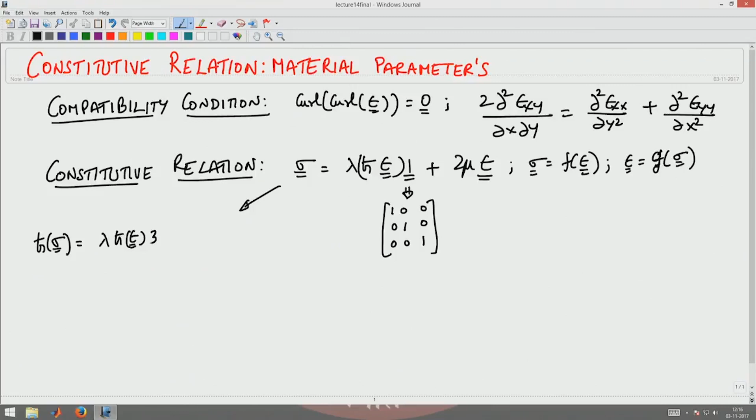From here I find that trace of sigma is given by lambda times trace epsilon, which is a scalar, comes out of the trace expression, times trace of the identity tensor, which is 1 plus 1 plus 1, equal to 3, plus 2 mu trace epsilon. So I get a relationship which says trace of epsilon is trace of sigma divided by 3 lambda plus 2 mu. Now I want to write epsilon in terms of sigma.

So from this equation I get epsilon to be 1 by 2 mu times sigma minus lambda by 2 mu times trace epsilon times the identity matrix. What I have done is I divided this equation by 2 mu and taken this lambda trace epsilon term to the other side of the equal to sign. So I got this expression.

Now I substitute for trace of epsilon from the earlier equation into here, to get the final expression for epsilon as 1 by 2 mu times sigma minus lambda by 3 lambda plus 2 mu, times the trace of sigma, times the identity matrix.

So the final expression for strain which we will carry forward is the following: epsilon is given by 1 by 2 mu times sigma, minus lambda by 3 lambda plus 2 mu, times trace sigma, times the identity tensor. This expression will carry forward.

So we will do a uniaxial experiment first, which is a common experiment done on materials to find the material parameters, and relate the Young's modulus and Poisson's ratio to the Lamé constants, where Young's modulus and Poisson's ratio are parameters obtained from a uniaxial experiment.

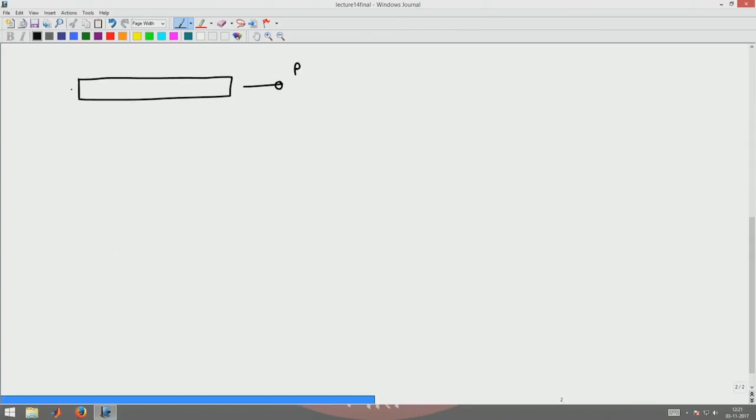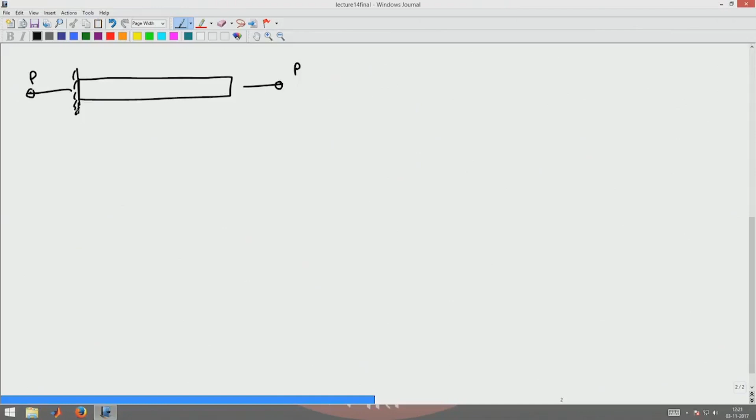So what is this uniaxial experiment? In a uniaxial experiment, you apply a force along the axis of the member alone. Say this is a member, a rod, or a square cross section bar, and you pull this bar along a particular direction with a force P. You fix this end, so there will be a reaction force P also coming in there. So what happens now when I pull this bar? It is going to shrink and it is going to expand.

It is going to shrink in the lateral direction and expand in the other direction. Now, let us say this displacement was delta B, this is A and this end is B, and that deflection was delta B.

Now, I have to assume a displacement field to start solving this boundary value problem. So the displacement field I assume is a displacement field U, which I want to be delta B at a distance L from end A. Say the length of the bar initially was L.

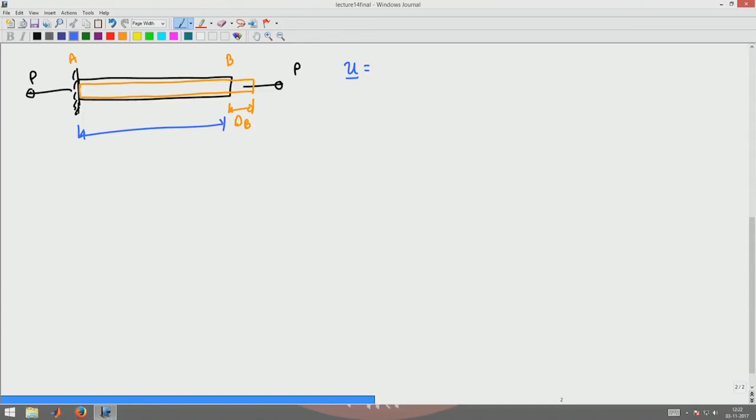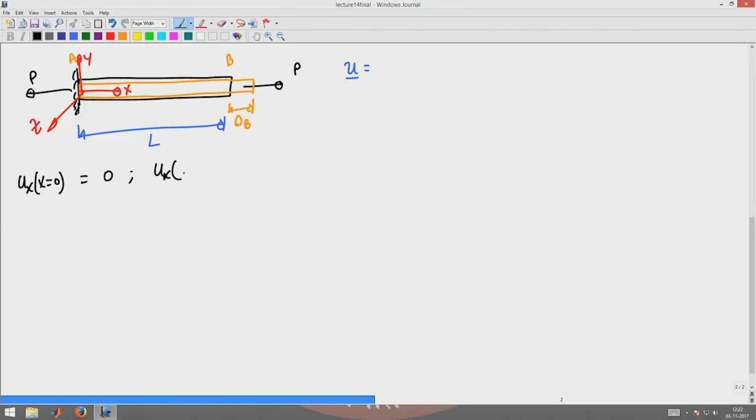Let us assume a coordinate system: this is x, this is y, and this is z. It is getting displaced by amount delta B along the x direction at x equal to L. And at x equal to 0, I know the x component of the displacement field is 0, and the ux component of the displacement at x equal to L is delta B.

Since I know these two values, I linearly interpolate for the intermediate displacements to get the ux component to be delta B times x by L. You see that when x equal to 0, this component is 0, and when x equal to L, this component is delta B, like what we want.

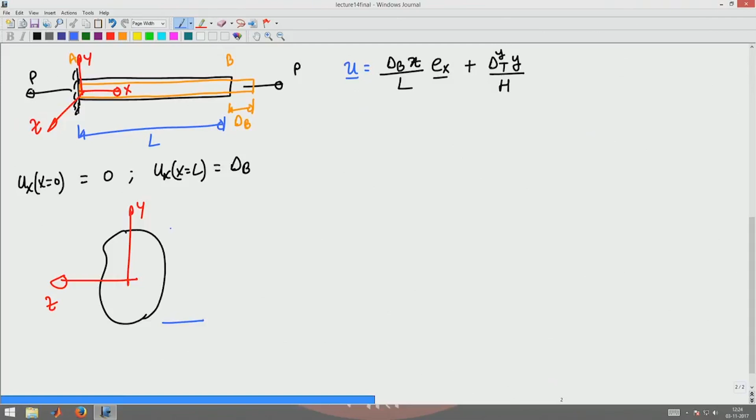Similarly, let us assume that the uy displacement is given by some delta transverse y by the depth along direction h, delta transverse along the y direction, wherein I have some arbitrary cross section with y and z like this, and I am assuming that this distance is h, and this width is going to be b.

So then I can write the displacement field as E y plus delta z t, z divided by b into E z.

Now, I assume the displacement field somewhat appropriate to the problem based on the experimental observation that the strain I measure is not varying along the axis of the beam, axis of the member. So that is the displacement field.

Now I have to compute the gradient of the displacement field H, which is gradient of u. That is: dou ux by dou x, dou ux by dou y, dou ux by dou z, dou uy by dou x, dou uy by dou y, dou uy by dou z, dou uz by dou x, dou uz by dou y, dou uz by dou z.

This will evaluate to be delta B by L, 0, 0, 0, delta transverse y by h, 0, 0, 0, delta t z by b.

Now I want to find the strain, linearized strain is defined as half of H plus H transpose. So I will get essentially only a diagonal matrix - the same diagonal matrix again: delta B by L, 0, 0, 0, delta T y by H, 0, 0, 0, delta T z by B.

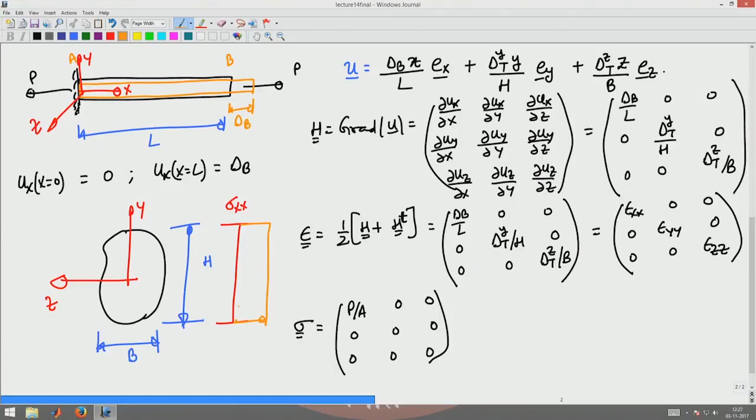This is because I am assuming that the variation of sigma xx, the component of stress due to the applied force, is uniform along the depth of the cross section, and it is uniform along the width of the cross section - or uniform over the entire cross sectional area. That is the assumption I am making.

Now I know the stress because I know what force I applied. So from here I use the constitutive relation that was prescribed, that we obtained here in terms of stress, to get the strain.

From here I get the strain to be, in terms of the stress: 1 by 2 mu times p by a, with the matrix having diagonal zeros, minus lambda by 3 lambda plus 2 mu times p by a into the identity matrix. So I equate this strain obtained here to the strain matrix here.

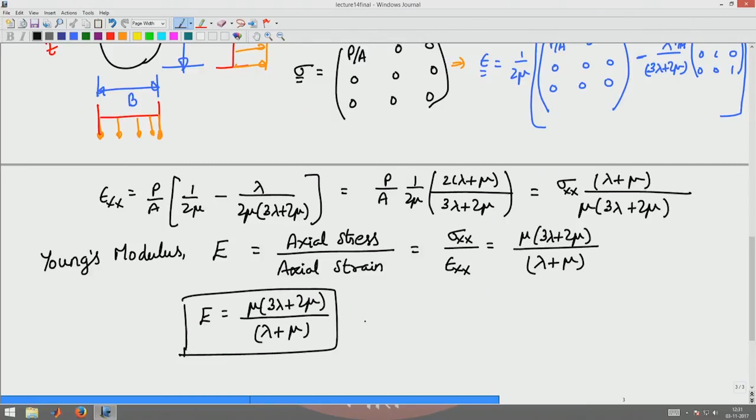Now, if I define Young's modulus as this, then the equation here can be written as equal to sigma xx by E. So from there I get sigma xx equal to E times epsilon xx, that is a constitutive relation.

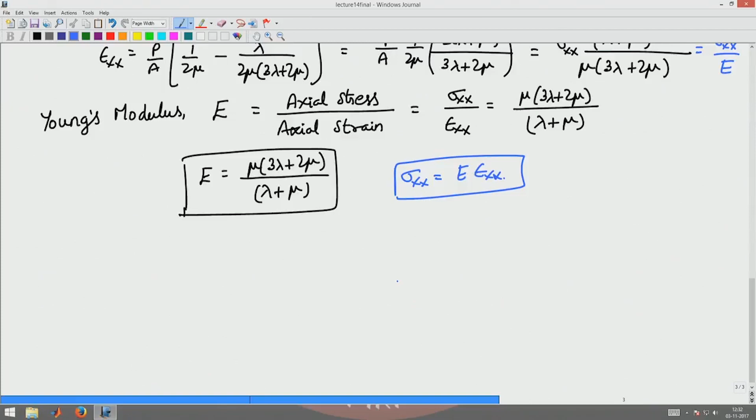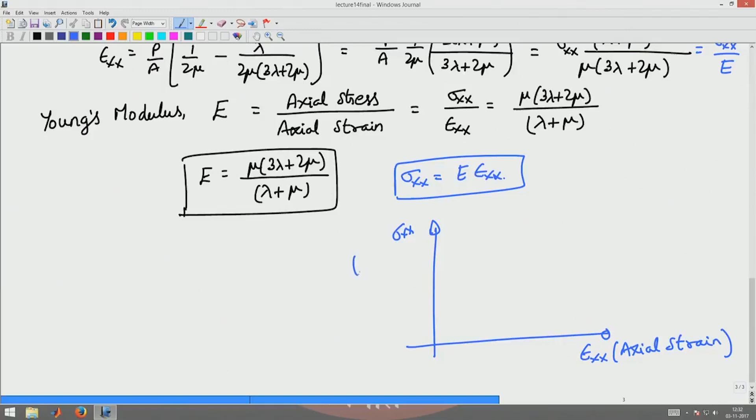So now how do I find E? I do an experiment, I measure the force applied and the axial strain epsilon xx, and then I plot epsilon xx versus sigma xx, the axial strain on one axis and the axial stress on the other. I will get some data points like this from the experimental data.

Now how do I find the value of E? I have to do a curve fitting. Basically, I want to find a linear relationship between sigma xx and epsilon xx which is close to the data points prescribed here, a curve passing through these points, such that the error between the experiment and the predicted sigma xx is the least.

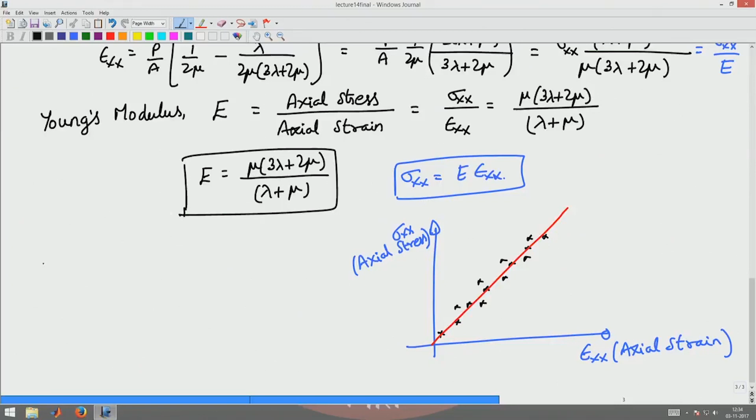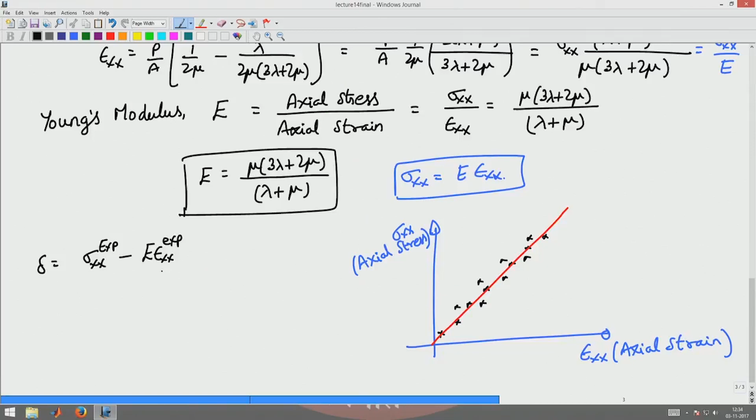For this we use the least square method to find Young's modulus, assuming this relationship. You define an error quantity called delta, which is sigma xx experimental minus E times epsilon xx experimental. This E times experimental gives the theoretical estimate of the stress. I want to square this and sum it for each ith value of stress and strain I am estimating.

For each of the n experimental data points, summing from i equal to 1 to n, I define this as the error measure. Then to find E, I want to minimize this error, so I say d delta by dE has to equal 0, which gives 2 times summation from i equal to 1 to n of sigma xx exp i minus E times epsilon xx exp i, into epsilon xx exp i, equal to 0.

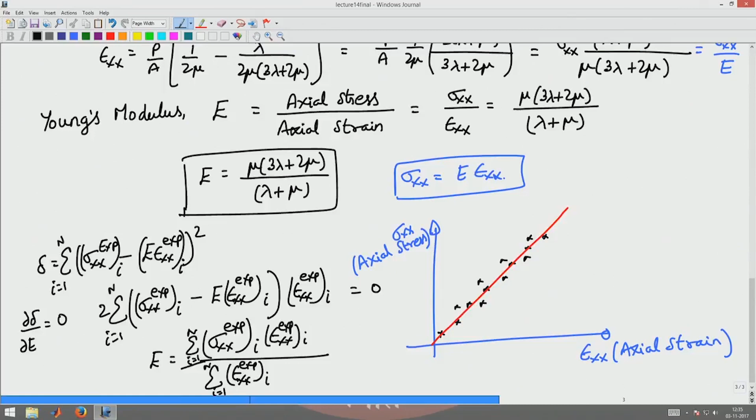From here, this is a linear equation in E, and solving it gives E as the summation of epsilon xx exp i into sigma xx exp i, divided by the summation of epsilon xx exp i squared, both from i equal to 1 to n. So basically I take the product of all the stress quantities with the corresponding strain quantities and divide by the square of the strain quantities to get the Young's modulus value.

Once I get this Young's modulus value, it will pass through the origin, that is a constraint we have: when sigma is 0, the strain has to be 0. Hence we get this expression for the Young's modulus.

Now this is basically relating the axial stress to the axial strain. Let us go back to the equation we had before, which connects epsilon xx to epsilon yy and epsilon zz in terms of the applied stress sigma xx. You will find that both are the same expression, epsilon yy equal to epsilon zz, given by the same term alone.

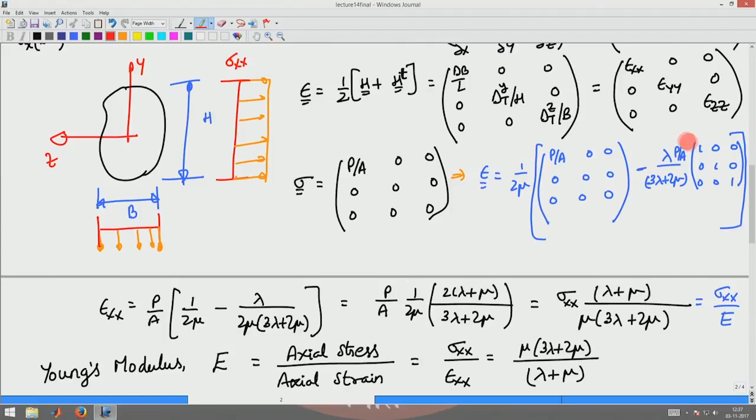Let us go ahead and do that. You will find that epsilon yy is equal to epsilon zz, equal to minus lambda by 2 mu into 3 lambda plus 2 mu times p by a. In comparison, epsilon xx was lambda plus mu divided by mu times 3 lambda plus 2 mu, times p by a.

Now I defined the second parameter that I want to find from the uniaxial experiment, called the Poisson's ratio, which we will denote by the symbol nu. Some use the symbol mu also for this, but we have already used mu for the Lamé constant, so we are not following that notation here.

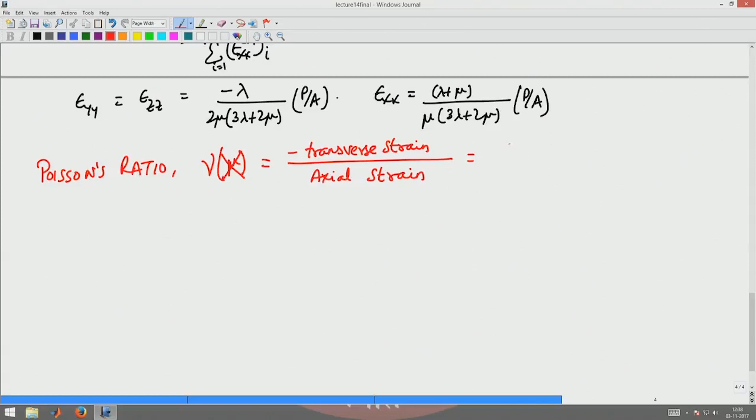This is defined as the negative of transverse strain to the axial strain, which in our notation is nothing but minus epsilon yy by epsilon xx. Now substituting for epsilon yy and epsilon xx from this equation, you find that this ratio is given by plus lambda by lambda plus mu. This is the Poisson's ratio.

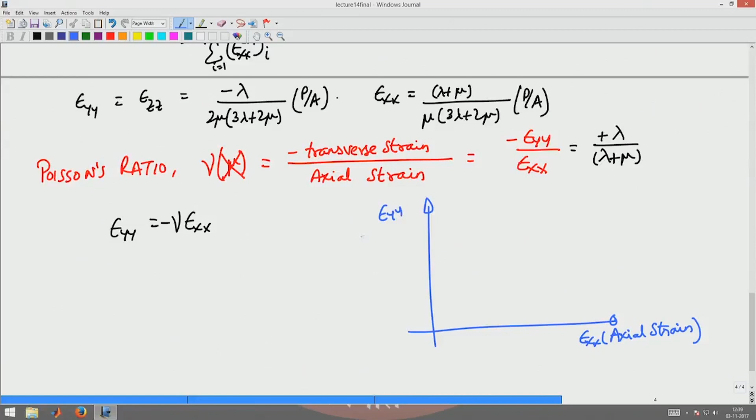So you have now the relationship that epsilon yy is equal to minus nu times epsilon xx. So how do you estimate the Poisson's ratio from a uniaxial experiment? You do the same thing: you plot the axial strain epsilon xx versus epsilon yy, the transverse strain.

You will get some data points here. What you want is a best fit straight line passing through those data points, the slope of which would be your Poisson's ratio.

Similar to the expression we got for the Young's modulus, you will find that Poisson's ratio is given by the summation of epsilon yy exp I into epsilon xx exp I, for I equal to 1 to n, divided by summation of epsilon xx exp I squared, for I equal to 1 to n. That will be your expression for the Poisson's ratio.

Negative slope here though, because this will be in the fourth quadrant. Actually this is plotting negative of epsilon yy. So that is going to give you the expression for the Poisson's ratio.

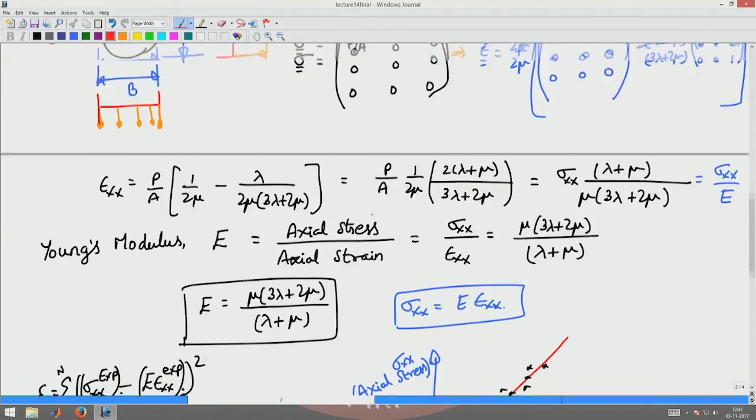Now there are two ways by which you can measure the strain epsilon xx and epsilon yy. One, you can use this expression to find the elongation in the axial direction and the contraction in the lateral direction to find the strains. You can use these expressions to find the strains from overall displacement, or you can use a strain gauge to measure the axial and transverse strain. We saw what a strain gauge is in the previous lecture.

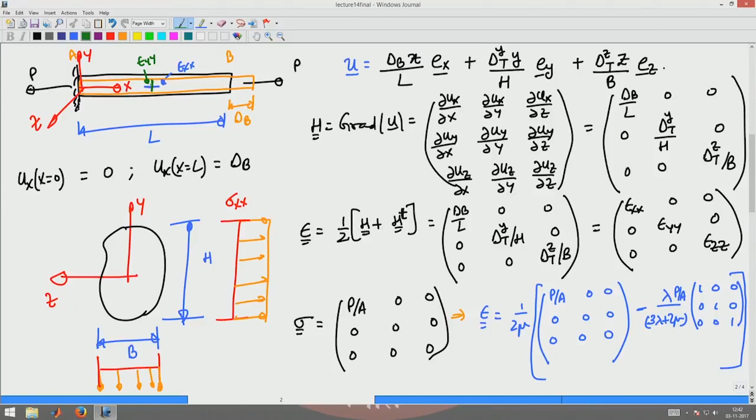So what I will do is I will stick a strain gauge here like this — this will give me epsilon xx. I will stick a strain gauge like this to get the strain epsilon yy, and I will stick a strain gauge perpendicular to that to get epsilon zz. So I can directly use a strain gauge to get these strains, or I can measure it from the displacement that I see in the body.

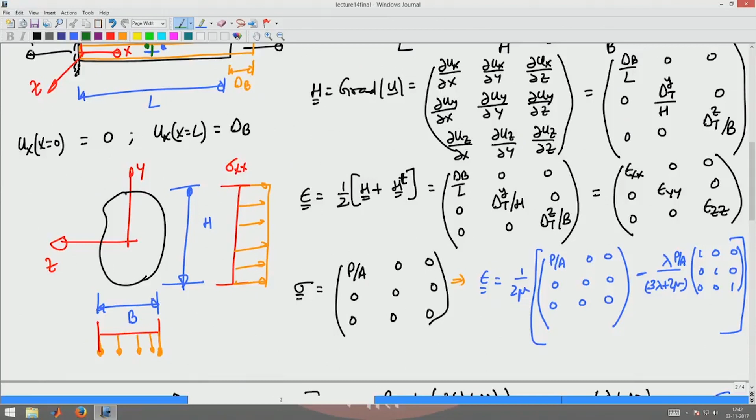So now we have found the expression for Young's modulus and Poisson's ratio in terms of the Lamé constants — the relationship between Poisson's ratio and Young's modulus expressed in terms of the Lamé constants. We found that the Young's modulus is given by mu times 3 lambda plus 2 mu, divided by lambda plus mu, and Poisson's ratio is given by lambda by 2 times lambda plus mu.

From here you will find that I can express lambda, solving these two equations in terms of the Poisson's ratio and Young's modulus, as E times nu divided by 1 plus nu times 1 minus 2 nu, and mu, the Lamé constant, would be E divided by 2 times 1 plus nu. So you will get these expressions for the Lamé constants in terms of Young's modulus and Poisson's ratio by solving these equations.